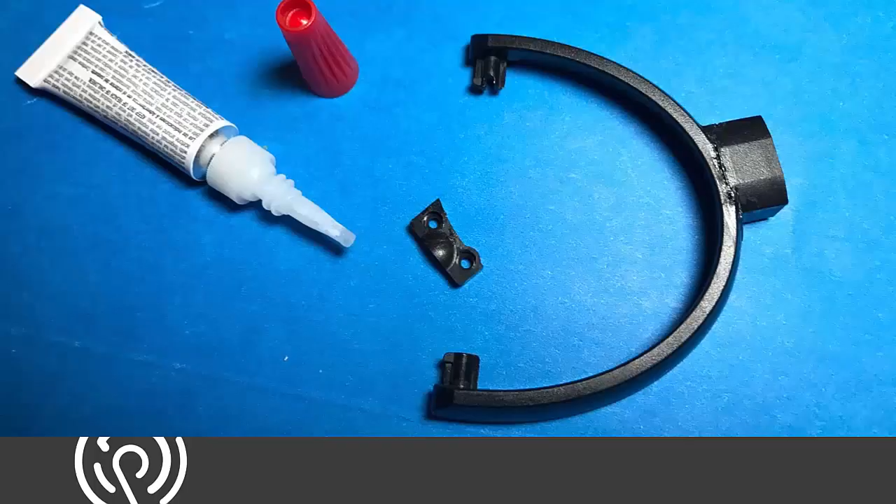Alright, so let's get on to the first step in the agenda. We're going to be preparing the parts for scan. And what do we mean by preparing the parts for scan? Well, the first thing is that we're going to have to glue the part back together.

The piece on the right now has been attached. I used some general super glue that I picked up in the store, and I glued the parts together. Another thing that we'll have to take care of is covering the surface of the part, because it's black, and the scanner can't read black.

So we're going to have to... let me actually show you guys a video of some of the process I went through in order to fix this problem.

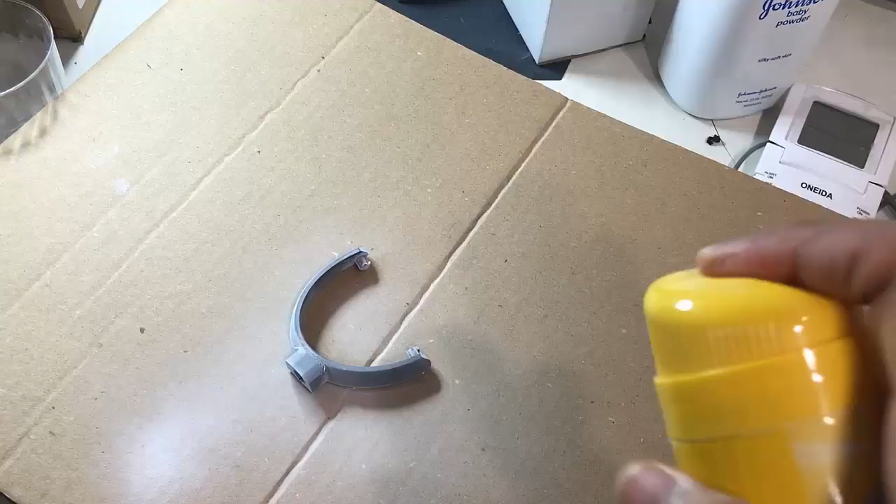Along with the super glue that I picked up, I also got myself a bottle of foot powder. This is a spray, of course, and we just need to apply a light coat of that spray on the part so that the scanner can then read that flat white finish. It doesn't have to be a whole lot. It doesn't have to be paint. I just use foot powder so that if I need the part again, I can just wash it, and then I'm done with that.

Alright, so that's all in regards to preparing the parts for scan. Now we're going to get into actually scanning.

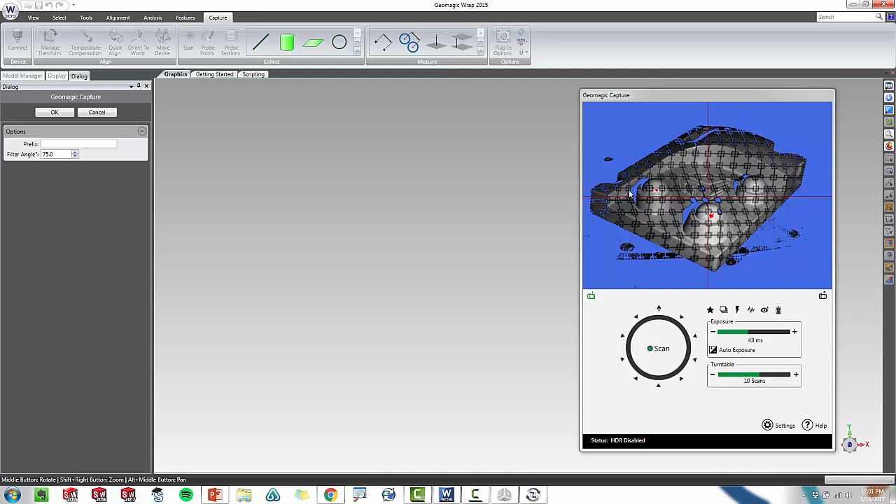Now that we are in Wrap, let's take a look at how we can connect the software to the scanner. The first thing we'll do is go to the Capture tab in the user interface, and we'll hit the scan button. That will show us the connected scanner, and we can see there's a part sitting on the turntable. We'll use that for our device registration.

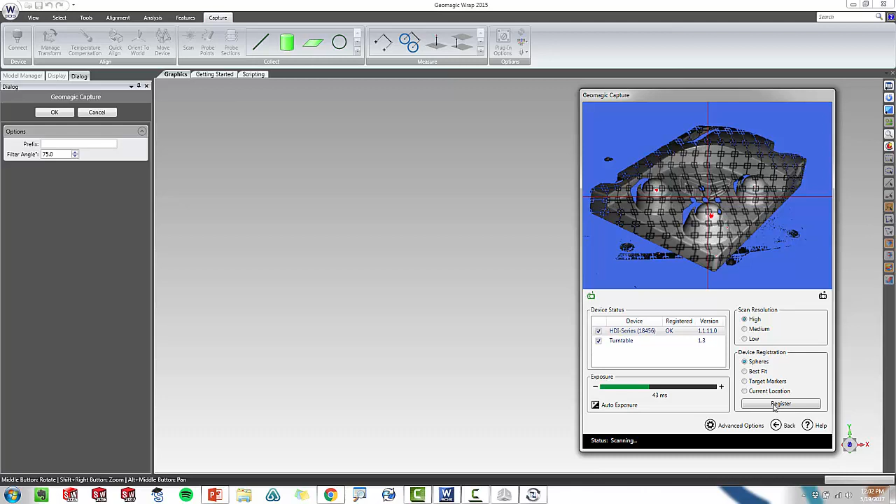We're going to use the spheres technique, and basically what this will do is the scanner is going to take a shot, and it's going to look for the location of those three spheres, then it's going to rotate the turntable. It's going to take a second shot, and read the part again and try to match the location of the spheres. What this does is it's able to communicate to the software where the center of the table is, and then the multiple scans that are going to be taken can be aligned.

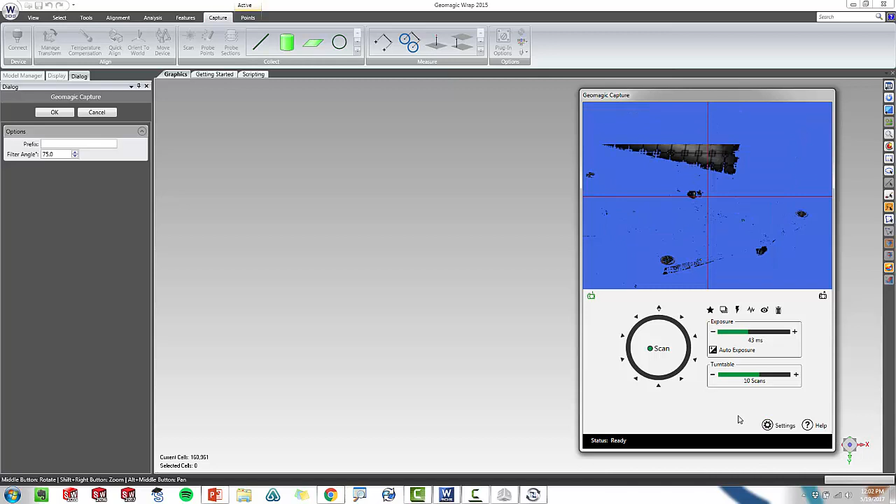Alright, now we're done with this process. I'm going to switch the part to the actual plastic hook that we're trying to reverse engineer.

I do see in the window here that we're a little bit overexposed. I'm gonna bring the exposure down just a tiny bit, not getting rid entirely of the red.

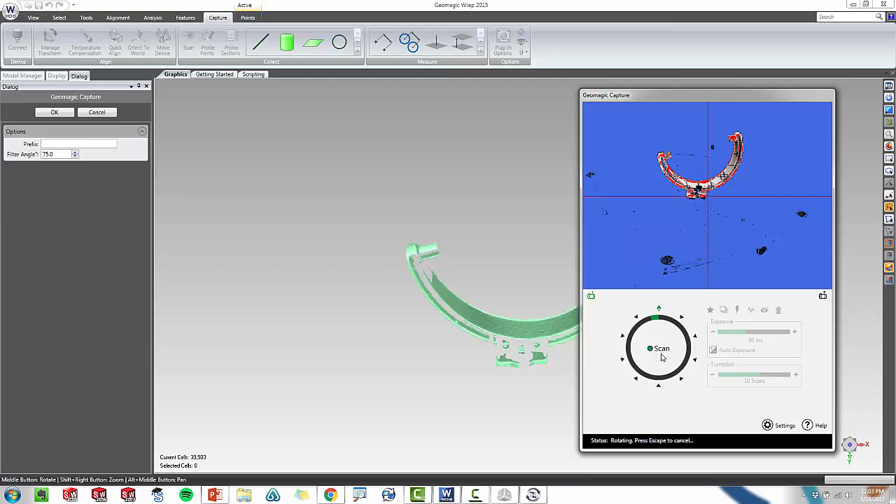I found that being a little bit overexposed is not a bad thing. I'm gonna leave the setting here to take 10 scans, and I'm just gonna hit scan. What the software will do is divide 360 degrees into however many scans we're going to take, and then the turntable is going to rotate. The scanner is going to take a picture, then it's going to rotate again and take another picture.

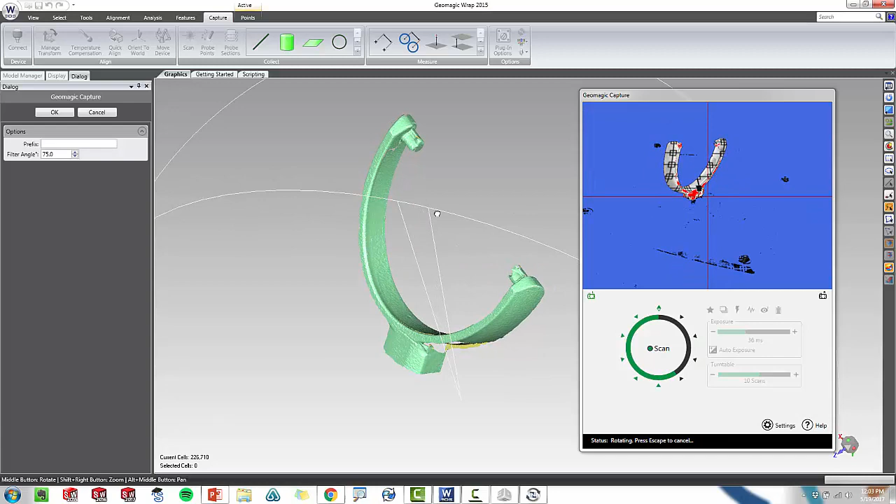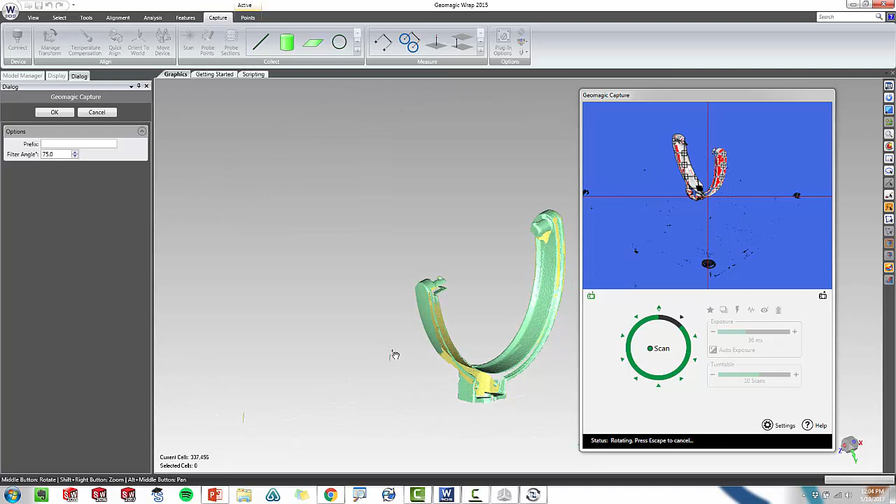So here is the part. We are at our sixth scan, and the part just builds up. It connects all the different scans to the previous one. We can see how that continues to happen live on our screen, and then in the end we'll go ahead and process that information and really align it properly so that we can get something nice out of it.

So it looks like we have one last shot right there. Let's wait for that to happen, and we're done. I'm just gonna hit the OK button here to exit out of that, and now we have the 10 different scans that we're taking properly aligned.

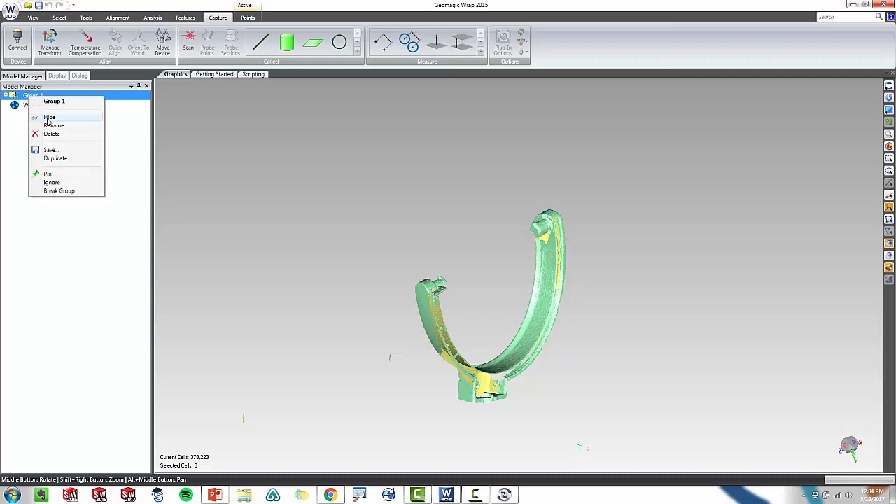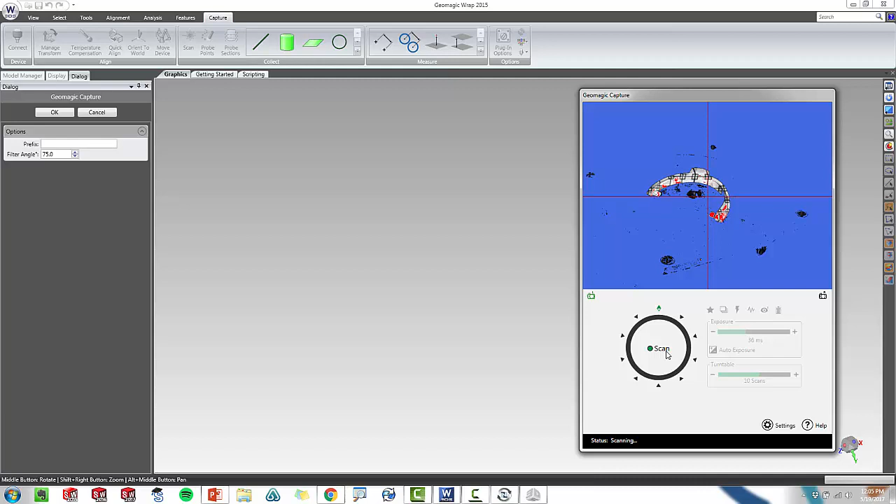We're gonna go through the process of aligning that a little bit more. I'm gonna hide that for right now, and I'm gonna take a second shot because I was able to see that I'm missing a little bit of the data on the underside of my clip, the plastic hook. So I'm rotating it and changing the orientation to take a new set of scans, so that I can combine what I get from the first one and the second one, and have a more complete set of data that I can work with.

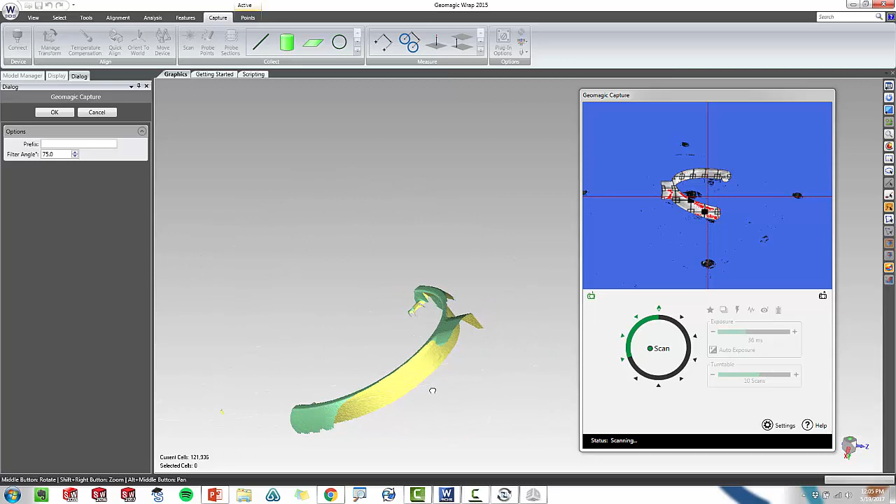I'm going to rotate the part here, and this is the portion that I was missing, the underside of that plastic hook, actually on both sides of the base connector. I can see how that filled already, and I should be able to see the part on the left coming up just now once it takes that shot.

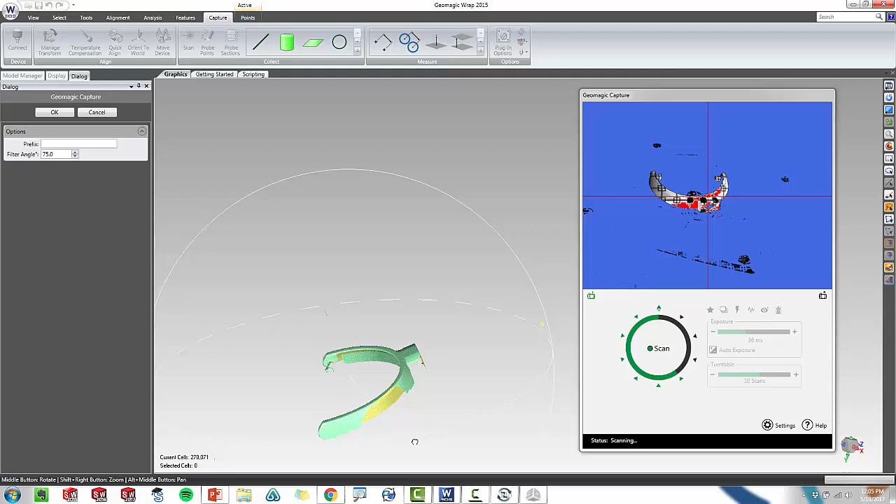So let's see how that comes up in the screen. There we go. Okay, so that's the portion that we were missing, so we know that we're good to go. And I'm just going to wait until it finishes taking the 10 shots so that we can then move on in the process and connect this data and align it with the first 10 scans that we took.

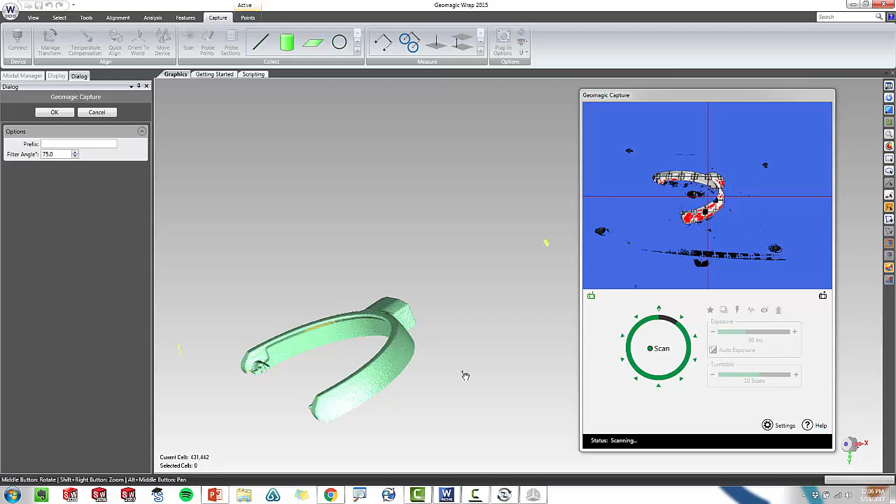Alright, 2 more scans to go. Alright, we're finishing up right now. One more, and then once that's done, we just have to hit the OK button and we should be good to go. Alright, it finished, and I'm going to hit OK.

And now we have all the data. We could continue to take more scans, but I'm just going to leave it with that. So the process is the same. This is basically the scanning portion of the project, and now we're going to move on to aligning the multiple scans that we took.

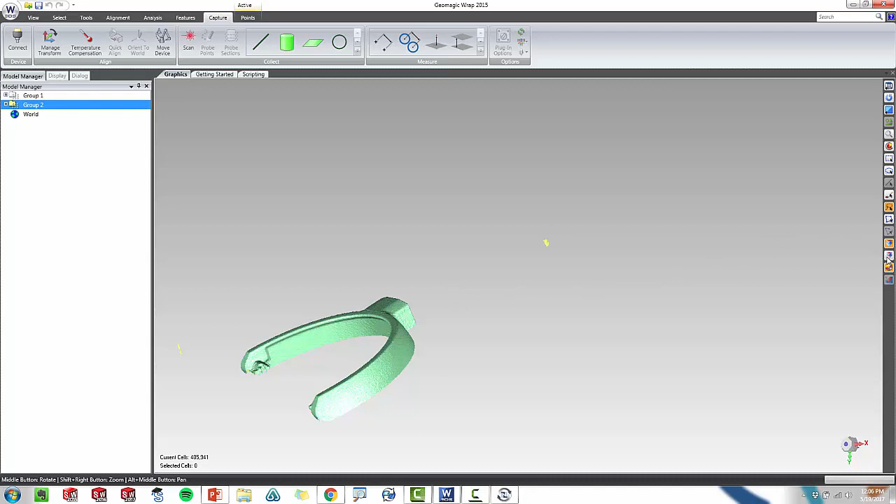So let's go back to Wrap, and before we start working with the scan data, I see that there is a little bit of geometry here that I don't need, so I'm going to make sure to delete it beforehand. I'll just select that with my lasso tool, and then just hit delete to delete that, and then I can clean that up. Oh, I see that I have a little bit of extra geometry here, so I'll delete that as well. Now the next thing that I'll do is use my global registration.

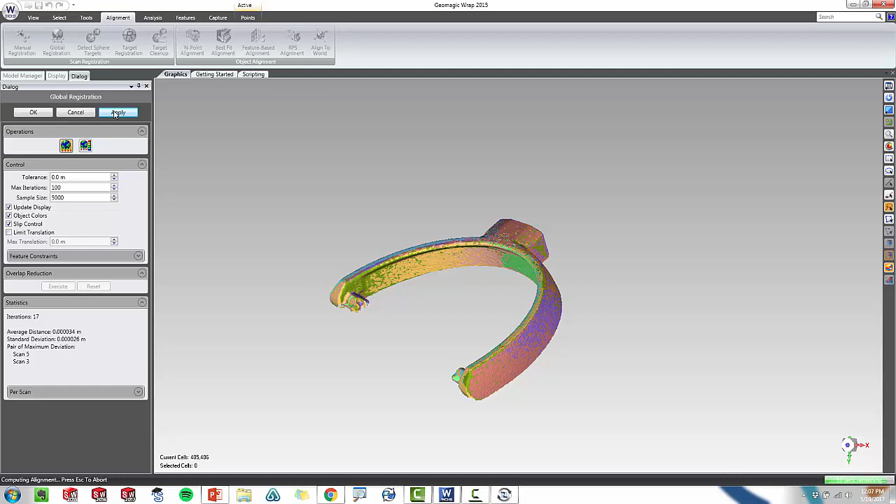You see that it turns the scan data into different colors, so the 10 different scans have different colors, and if I hit the apply button here, it will calculate the different points and it will register better, so it will further align those scans. So I'm going to hide that, and I'm going to show my first group, my first 10 scans, and I'll do the same thing.

I'll go to global registration. Oh, before that I have to remove a little bit of extra geometry here. That can actually be fixed later, but I'm just going to take care of it right now. Okay, global registration, apply, and you can see how the graphics area shows us the alignment, how it's much better now.

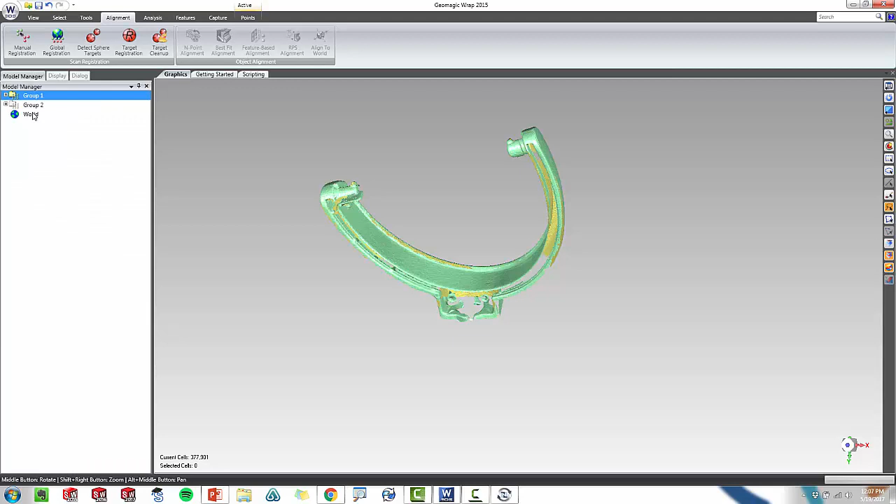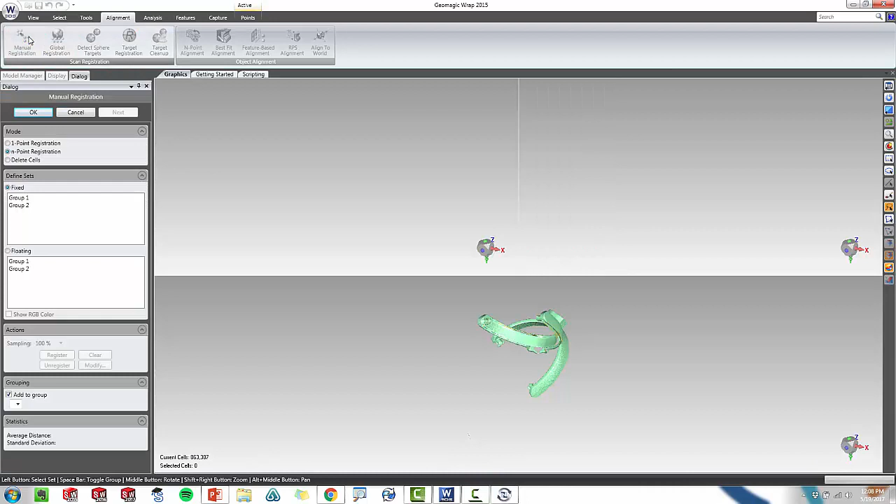Now that we have that, we can move forward and show the two different sets of scans that we took. What we're going to do is align both of those groups. So I'm going to hold down control, select both of them, and instead of doing global registration, I'm going to do a manual registration. This is a very cool tool.

What we're going to do is fix one of the two selected groups. It gets locked into the first box there in the graphics area. We're going to leave the second one as a floating group, and then we have that independently on the top right, and both of them on the bottom.

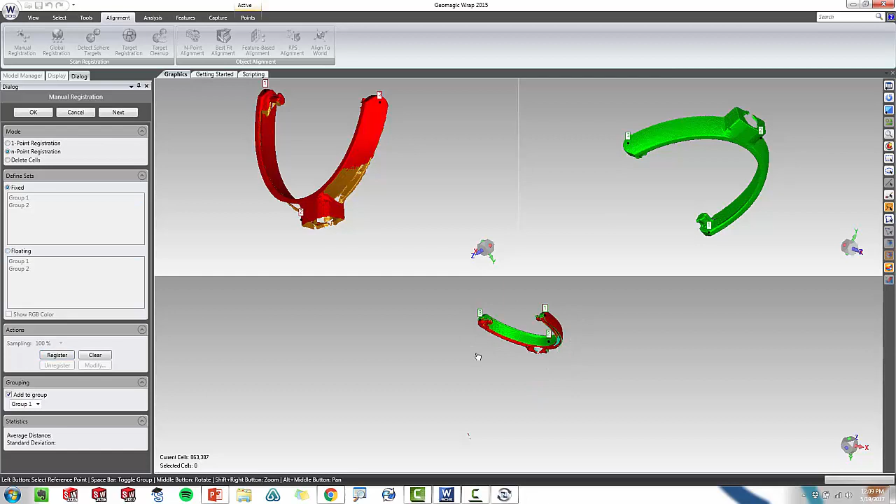So now we have to choose three different points that are common between the scans on the left and right. I'm going to choose the side and click on this edge right here. Typically, portions of the model or scan data that have high curvature are better. I'm going to choose this third one on the other side, and make sure to click on the same portion. And now on the bottom, you can see how that is updated, and it's aligned much better.

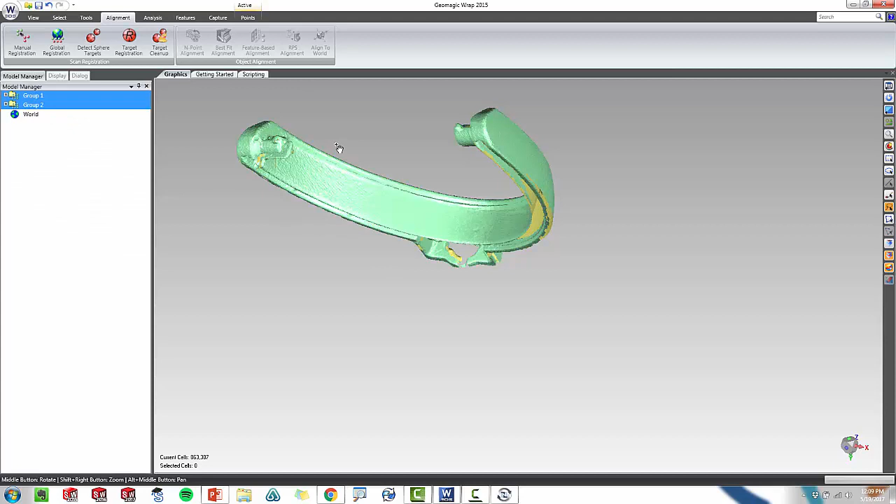Now, of course, we're going to do another global registration, and I'll hit apply for that to take effect. You can see how that's much more aligned. Okay, all right, so I'll hit OK, and that concludes the portion of the project where we're aligning the scan data.

I see here that I still have a little bit of extra geometry. I'm going to delete that. All right, this is more than enough for what I need to do. We can continue to take more scans and continue to align that, but this is going to be more than enough for what we're going to do.

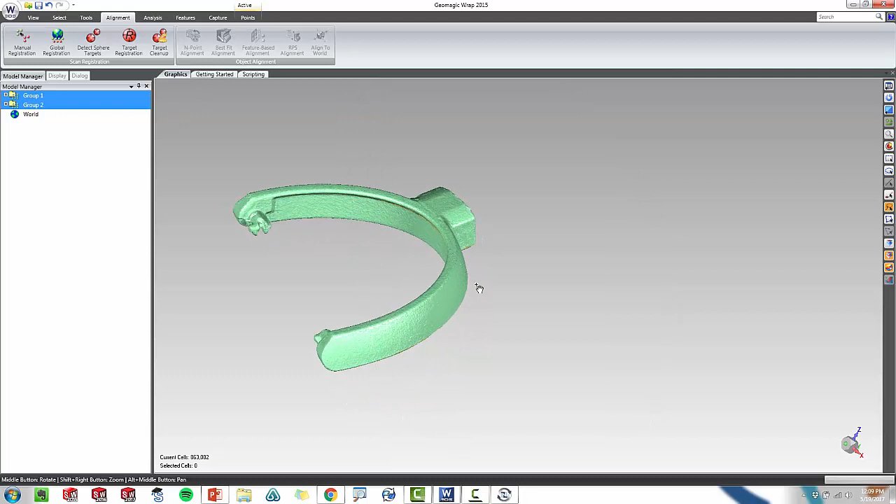We're not going to get every single detail. We're just going to get the overall shape of the plastic connector, and then we can work with that. So the next thing I'll do is convert these two sets of groups into one group.

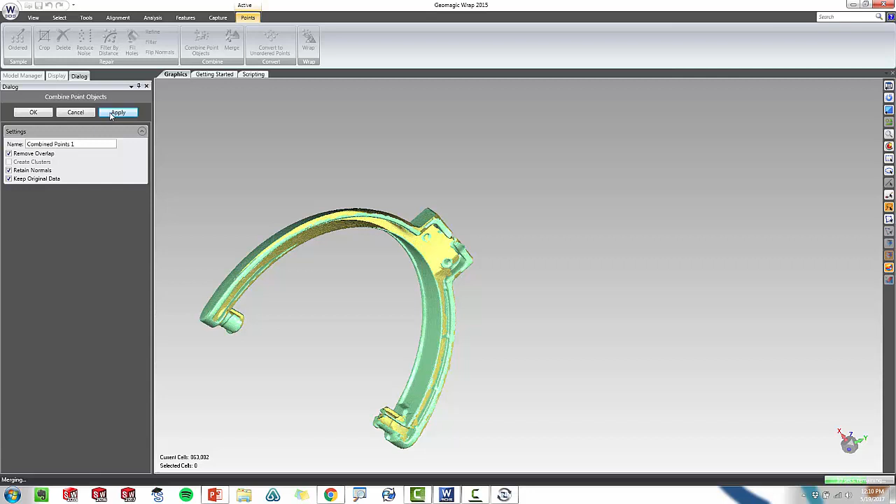So I'm going to convert the points into just one single feature. I'm going to keep the original data just in case something goes wrong. I can still go back to the original data and work with that. I'll hit apply. That's going to take some time.

I'll hit OK, and then I can hide the original groups, and just show the merged points in one single feature, as you can see there on the left.

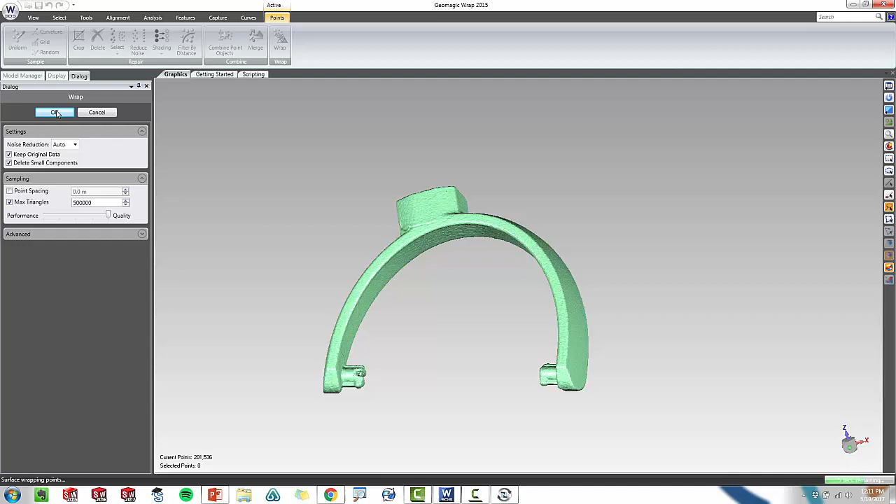The last thing we'll do is convert that into a mesh. I'm going to click on my wrap tool, and here on the left we can specify a couple of different settings. I'll leave that as it is. I'll hit the OK button, and now this has been converted into a mesh.

Alright, so let's go back to our PowerPoint. This concludes the third step, which is aligning multiple scans. So in summary, what we did is take the multiple scans, align them, and then once they were aligned, combine them into one feature, one point feature.

Moving on to the fourth step, we're going to prepare the data for export. So we're going to clean up the mesh a little bit so that it's better for when we move on to the SolidWorks portion of the next webinar.

Back in Wrap, this is the mesh that we generated in the last portion, step 3. And what we're going to do is fix it, to clean it up a little bit.

The first step I always suggest is going to the Mesh Doctor. The Mesh Doctor gives us a very good analysis. It tells us what things are wrong with the mesh, maybe some non-manifold edges, self-intersections, highly creased edges, a couple of different things, spikes, small components, and then it gives us the option to fix that.

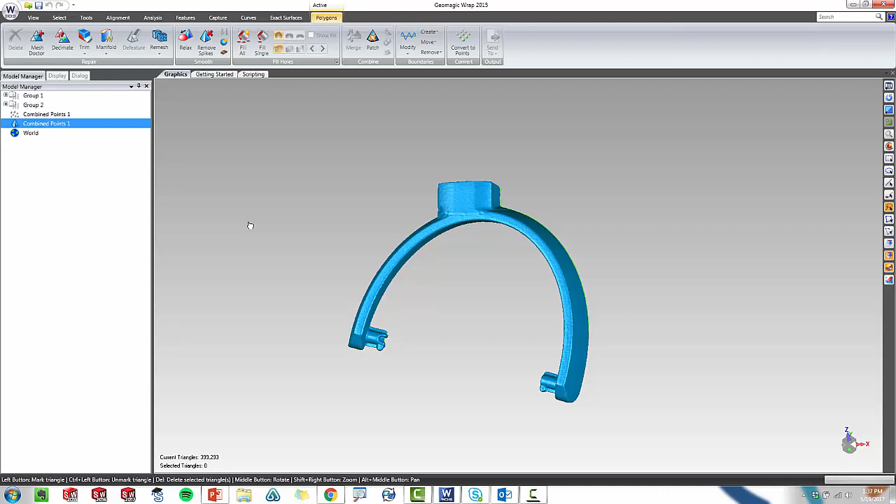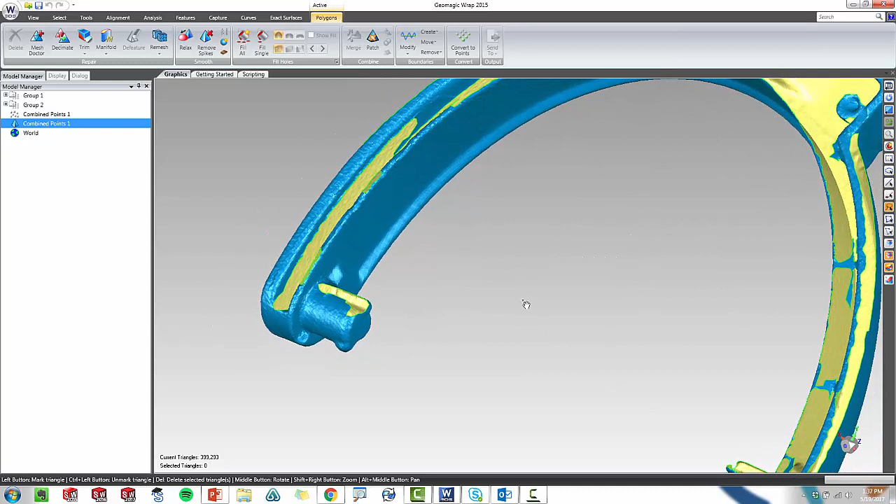Okay, the next thing that we're going to do with this mesh is I'm going to rotate it a little so that you can see that there are gaps. There's a lot of holes in the mesh, and let's take a look at how we can fix that. So I'm just going to give you an example on this bottom piece here. I'm going to go ahead and fill that hole.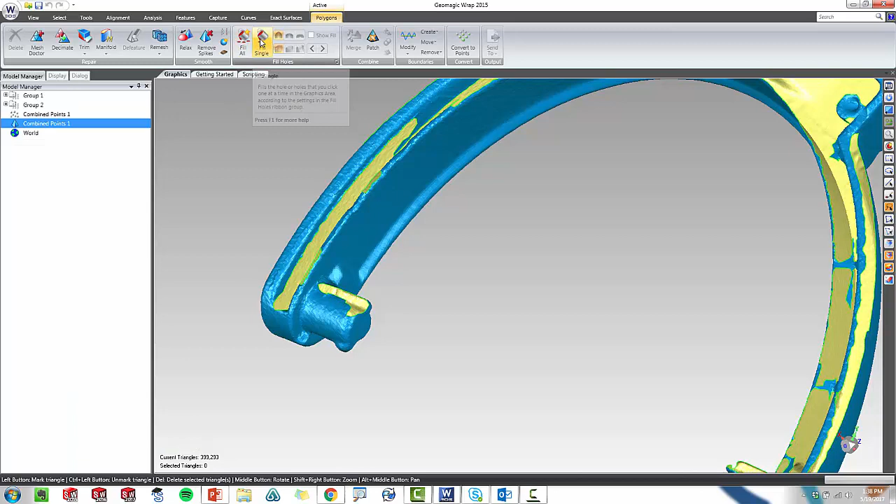So I'll go to my fill command, and I'm gonna use the curvature mode. There's also tangent and just flat, but I'm gonna leave it as curvature, and it's actually not the fill all. It's gonna be the fill single, because I don't want to fill all the holes in one shot. And now I'm gonna just select that hole, and the geometry gets added, and it calculates the curvature, so it is sensitive to the curvature of the surrounding geometry. So that's how I can go ahead and fill all these different holes.

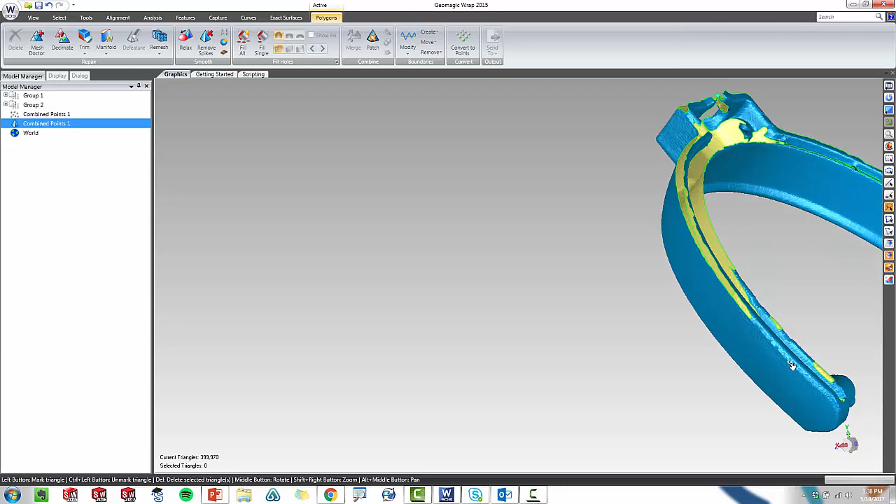Now, another good example of that is going to be this tiny portion that I'm showing right now. I do have the information on what that radius is going to be here on this portion of the mesh. So I don't really care if the fill gives me something that's not exactly like the part is, because I'm gonna take that measurement once again from another portion of the mesh.

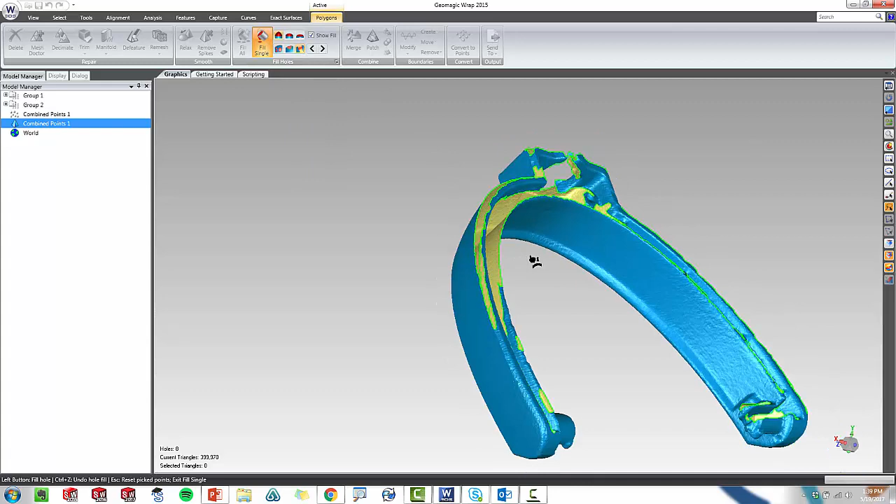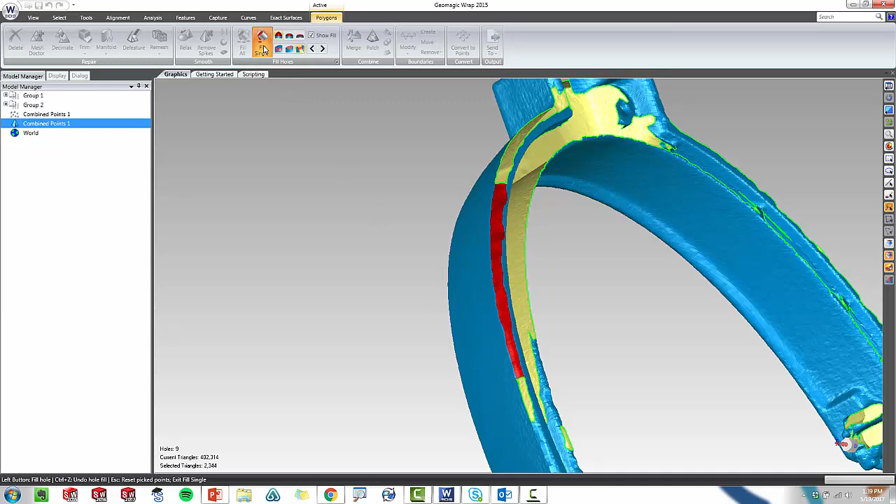I'm gonna create a bridge here, so I'll go to the fill tool and I'm gonna select this edge of my mesh, and then drag and then do the same thing here on top. And what that will do is it'll generate, once I release my click, a new portion in my mesh. Right, I'm gonna exit out of that command so it finalizes that, and I'm gonna rotate so you can see that it does keep in mind the curvature of the surrounding edges. Once again, it looks a little bit more flat, but I know what that curvature is going to be.

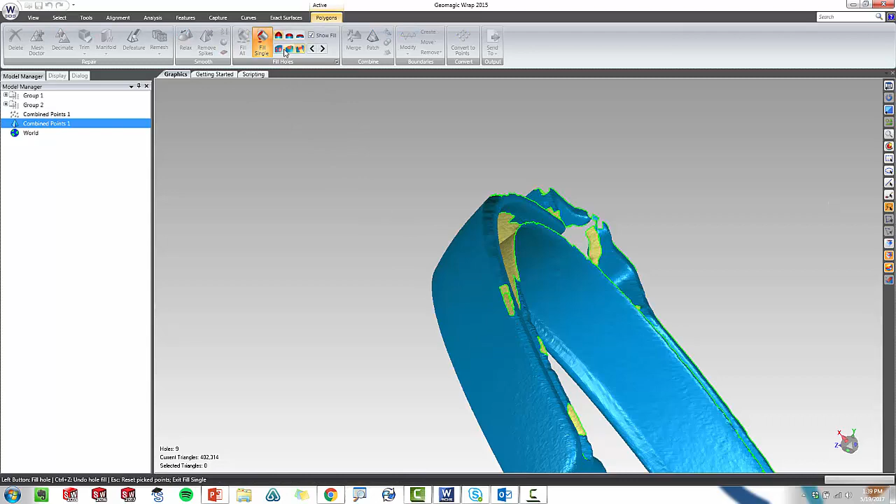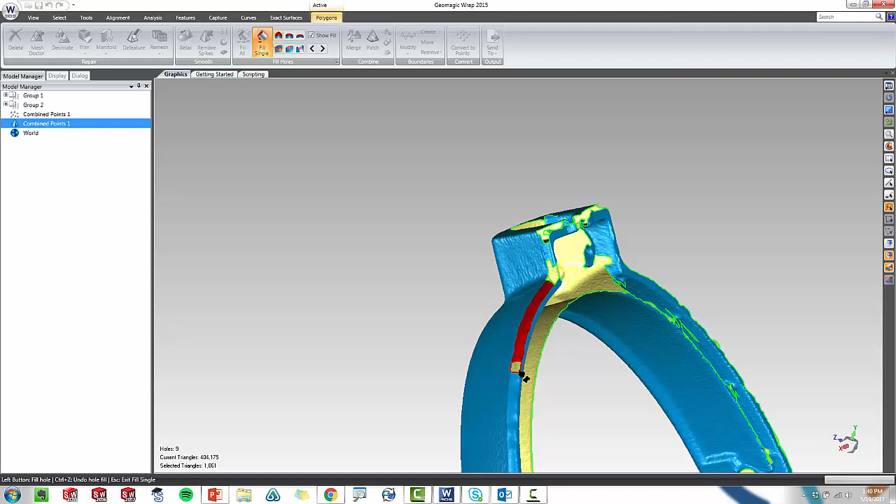Now I'm gonna be able to just fill that hole, not as a bridge, but as an entire hole, because that's what we have here. And I'm going to create a new bridge here on top. So let me just select this edge and drag, and I'll go to the other side, click and drag, and that's going to generate that portion right there. And lastly, I'm going to create another filled hole with the curvature in mind, and that's all I'm actually going to do for fixing up the geometry here.

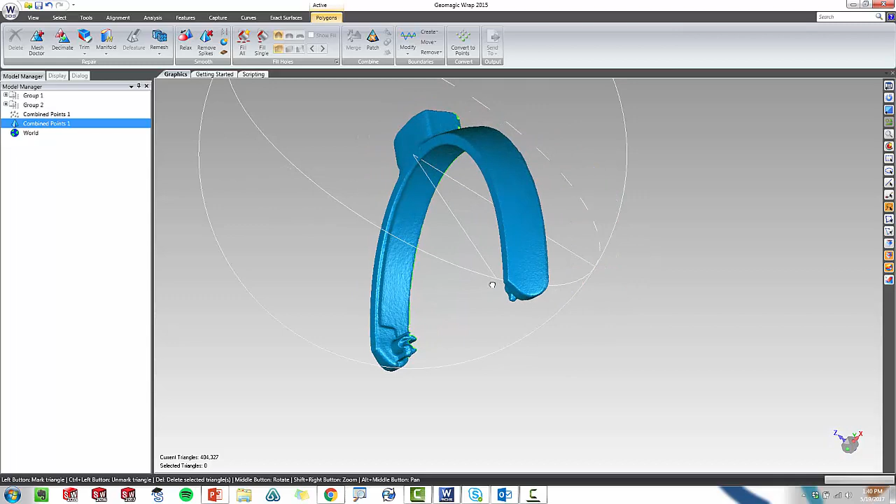My intent with this scan data is to be able to model this general shape, right? And I have enough information already to be able to take a cross section in SolidWorks and then just model that as a sweep. I don't need to fix all these different holes that are here. It would just be too time consuming, and I'm not going to be using the exact surface tool, which would need a very clean and enclosed mesh. It's just going to be for reference. So I'm actually good to go.

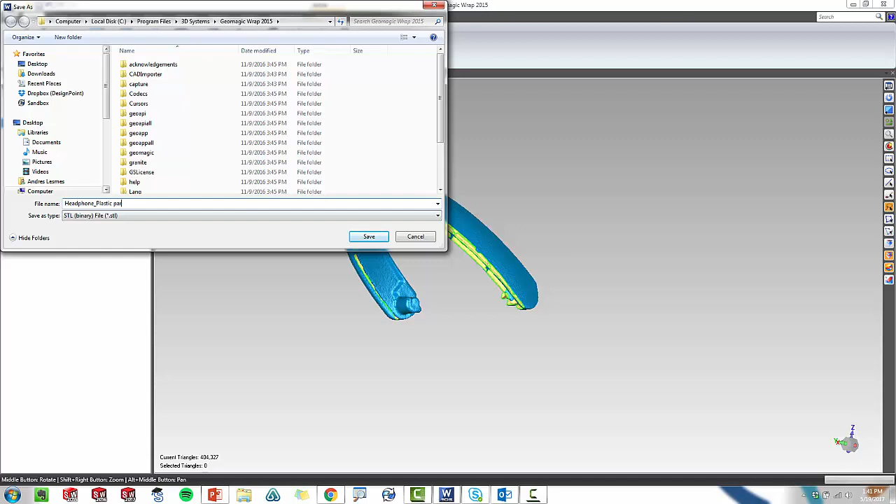I'm going to save these out as an STL. That's one of the files that SolidWorks will read with the Geomagic add-in. So I'll go ahead and save these out and put it on my desktop, and I'll name these files something like headphones. Headphone plastic part. All right, put that on my desktop, and that's it. So now we have ourselves a good piece of scan data that we can work with, and that basically concludes these four steps.

So in summary, what we did was we prepared the parts for scan. We actually scanned them. As a third step, we aligned the multiple scans that we had, and we lastly prepared the data for export. So that concludes this first webinar.